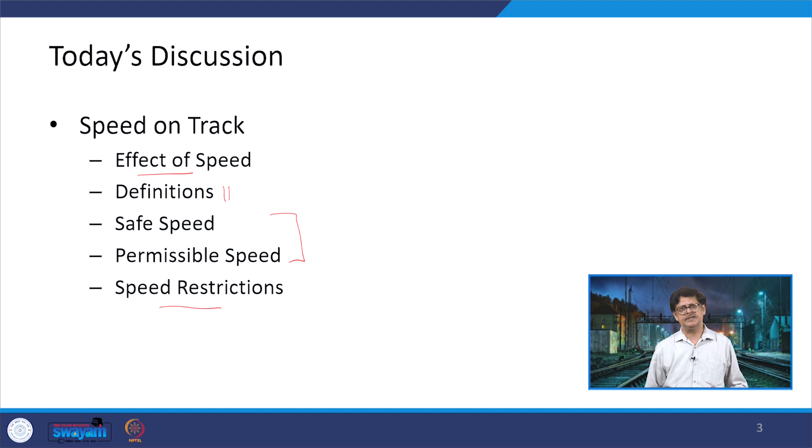Now speed on track has been classified by the classification of the tracks. If you remember, this classification of the track we discussed previously, that was from group A to group E.

In the case of group A, the speeds are up to 160 kilometers per hour, but in group B, it is 130 kilometers per hour. Group C is related with the suburban sections, which are available in the big metropolitan cities. Group D has two categories, normal and special.

In the case of special, speeds up to 110 kilometers per hour are provided, and the traffic density is more than or equal to 20 GMT, gross million tons. In the case of D, the speeds remain the same, but the traffic density is reduced, it is less than 20 GMT. In group E, all different sections or branch lines will come, where the speeds go up to 100 kilometers per hour.

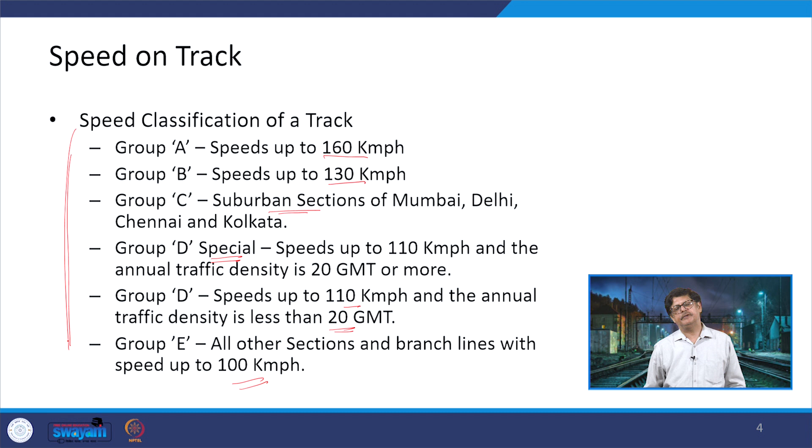So this is one idea regarding how the various speeds are going to be there on the different categories of tracks.

Now let us understand what we have discussed so far in different lectures, wherein speed has been talked about in combination with other things. We talked about the track structure, covering 110 km per hour speed to 160 km per hour speed, which was discussed under two subcategories: 110 to 130 and 130 to 160 kilometers per hour. There we discussed the height of the ballast cushion, the formation width, the slope, and the cess. So all those different aspects were correlated with these speeds.

Another discussion was related to industrial rails, IU rails, mainly used in industrial areas, where the speed restriction can be up to 50 kilometers per hour. We also talked about how speeds are specified with respect to the rail sections being used. If you are talking about lighter rail sections, the speeds cannot be high; for that you need a heavier rail section.

Sleeper density also is correlated with the speed, and these things are covered when we talked about the track structure. Similarly, about the ballast cushion.

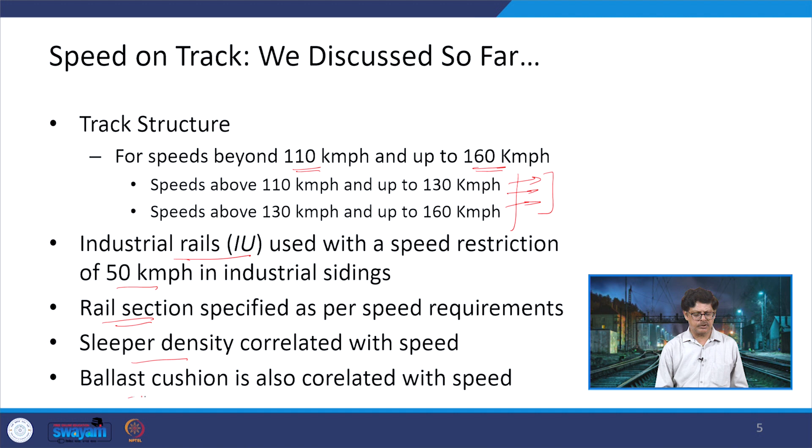Then we said that if yielding formations are there, the speed should be restricted, and first the formation should be treated, then only the speeds can be increased. The speed restriction is also followed where welding is being done between two rails, and speeds can return to normal conditions only after 30 minutes, or if grinding operation is going on, then the speed should also be reduced. The grinding operation comes up when we talk about corrugation on the rail head.

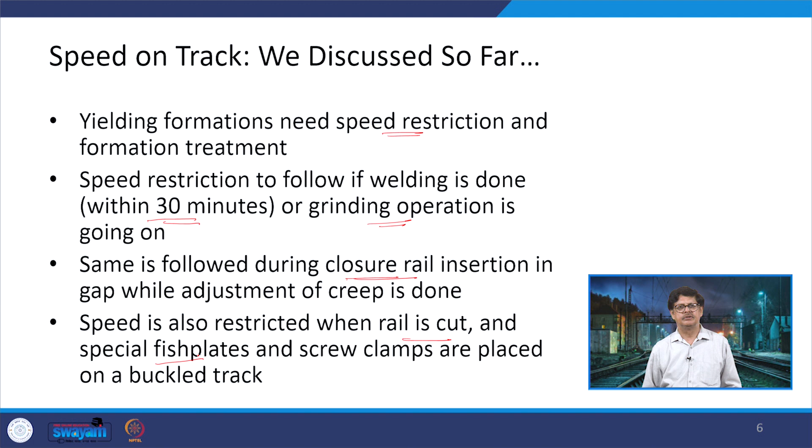The same is followed during closure rail insertion. If there is a gap between the rails, or some section is removed because of wear, failure, or fractures, then closure rails will be used, and during this operation, speed restriction will also be there. Speed is also restricted when the rail is cut, or when special fish plates or screw clamps are placed if the track has buckled.

Then we talked about major maintenances - lifting, alignment, deep screening, sleeper renewals - in all of these cases, and even where there are different temperature zones and the temperature goes beyond certain limits, the speeds need to be restricted.

Temporary speed restrictions sometimes need to be followed, as discussed when we talked about long welded rails or continuously welded rails. In those tracks, when the joining of rail ends is done with 1 meter long fish plates and special screw clamps, as discussed in the previous slide, speeds are restricted. There is a speed restriction of 30 kilometers per hour during the de-stressing operation of LWR.

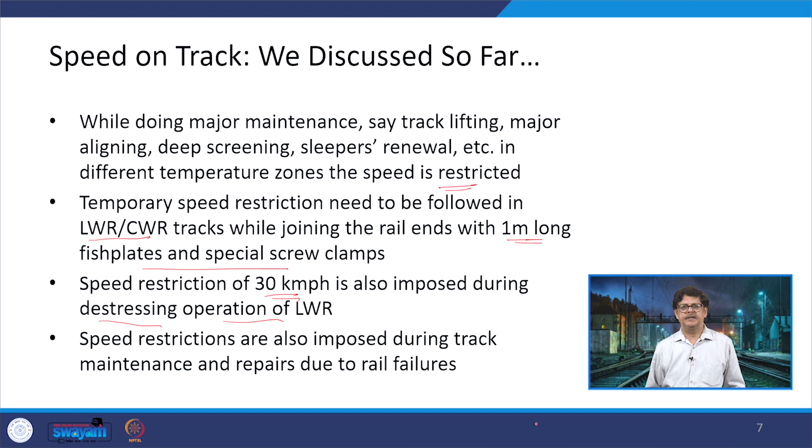Speed restrictions are also imposed when there is track maintenance and repairs due to rail failures.

Now let us look at the effect - there is a dynamic effect of the speed. If you see here on the diagram, say this is a wagon or a vehicle, you can define it whichever way you want. So this is the x axis, the y axis here, and z axis on this side, and the train is moving in this direction towards the right hand side. So what are the possibilities which can happen?

There can be a rotation about an axis or there can be a movement about an axis, and those are the things being defined here. If you look at the x axis, if it is rotating with respect to the x axis, then that is defined as rolling. It means it is moving in this form, taking oscillations like this.

When you talk about the y axis, then it is pitching, that is the rotation which is about the y axis. So sometimes this goes down and this goes up, or sometimes this goes down and this goes up - that sort of pitching condition will be there.

Then in the case of Z, that is known as nosing - rotation is known as nosing. That means there is a possibility that it will be moving in this form with respect to the z axis. So the movement can be like this, depending on which particular axis we are talking about.

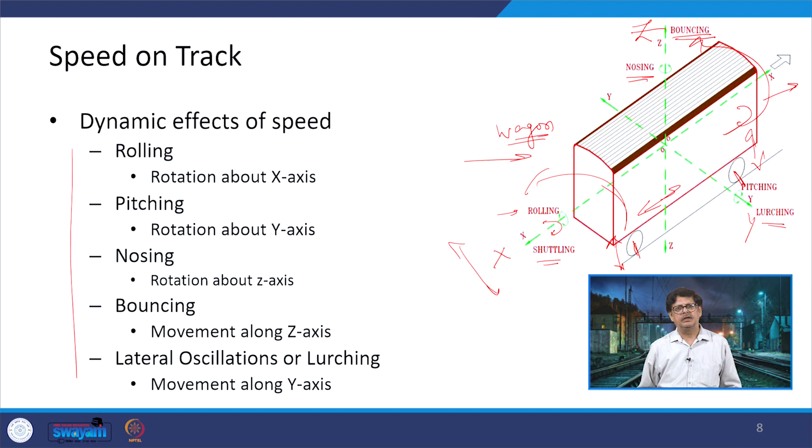Now, once we have discussed that, the other thing which may happen is resonance. This resonance occurs at the level where the wheel and the rail are in contact with each other, and when the train moves at a faster speed, those vibrations or frequencies get induced and transmitted to the rail head. So there is a sort of resonance which comes, and because of this resonance there is a possibility that the rail may fail. If it goes into failure, you have to go for maintenance. So in the case of high speed rail systems, this resonance becomes an important aspect which needs to be taken care of, and accordingly the material selection has to be taken up.

Springing action is again related to the vehicle - what type of springing is being provided, accordingly it will happen. Suspension characteristics are again related to the bogies. These are also going to be induced because of the speed on the track and the irregularity of the track in terms of the profile, in terms of the formation being provided at the bottom. So accordingly, these types of effects will come.

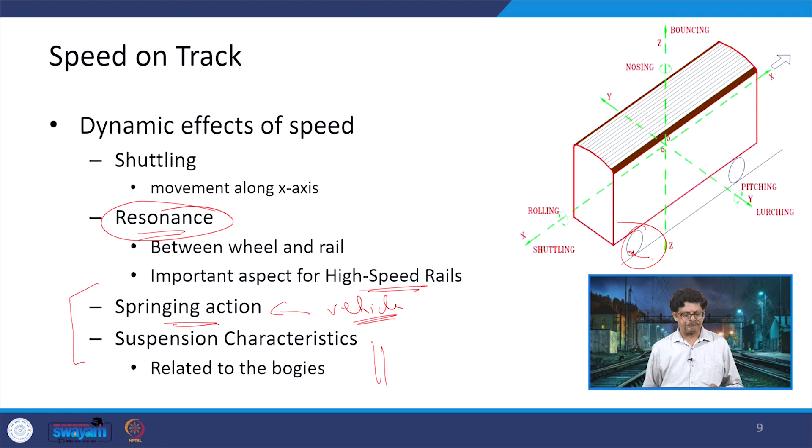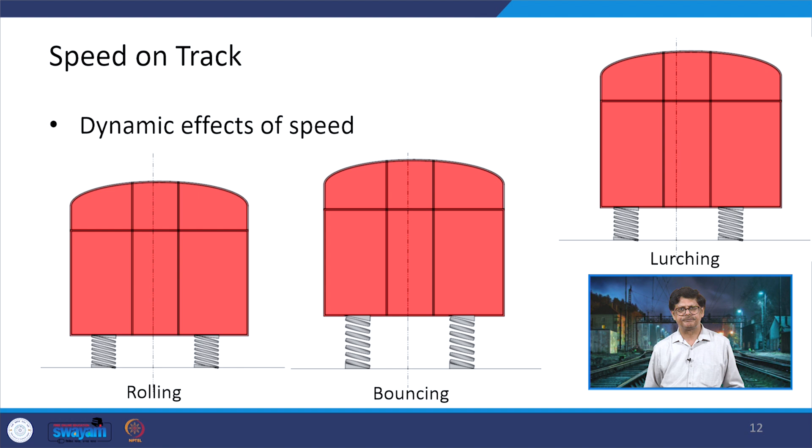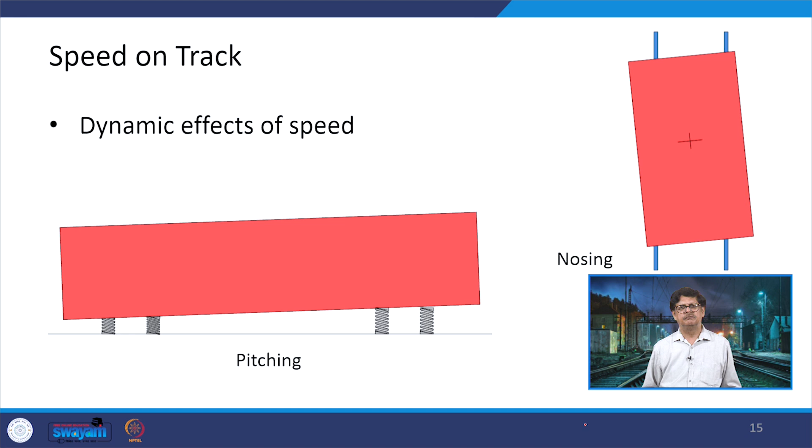Now let us talk about some definitions related with the tracks, which are computed as part of the geometric design and calculations.

The first one is maximum permissible speed on the track. This is the speed allowed for the operation of trains based on the structure - what type of formation, what type of ballast cushion and its thickness, and what types of sleepers and rail sections are being used. Based on this, the maximum permissible speed on the track can be defined.

One aspect we use is the average speed of trains, which is finally used to calculate the equilibrium speed - we will see about that. It is a journey speed dependent upon the length of the route and the time taken by the train to cover that route.

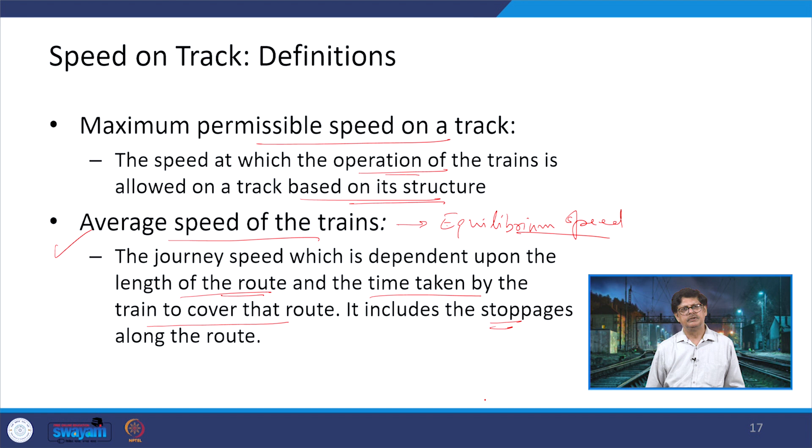This means the stoppages at different stations will also be taken into consideration, and that is why this is called an average speed - it is not a running speed. In the case of running speed, stoppages are not considered.

The maximum sanctioned speed on the track is a speed sanctioned by the track engineer, only under emergency conditions. This sanctioned speed is notified for each type of track and section. It is determined based on the standards of interlocking, the type of locomotive being used, the type of rolling stock, and the condition of the track. Considering all these aspects, the track engineer decides the sanctioned speed up to which the train can move, subject to an emergency condition.

Safe speed on a track protects the carriage from danger of overturning or derailment and provides a margin of safety. It is obviously lesser than the maximum permissible or sanctioned speeds. Up to this speed, the movement of the train is assumed to be safer and comfortable. Beyond it, there are possibilities of more forces or dynamic effects, which may cause issues.

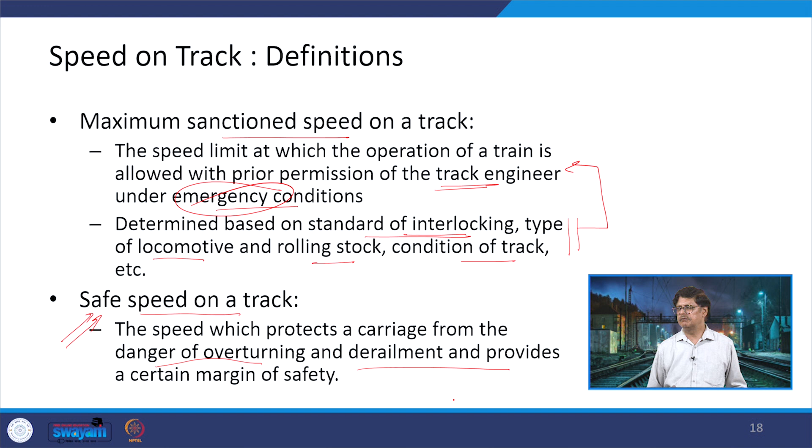As mentioned earlier, the average speed of trains on a track is used for finding the equilibrium speed. Equilibrium speed is also defined with respect to the centrifugal forces induced on a curved track. On a curved track, centrifugal force is induced, and to counter that we provide a cant, which will counter the centrifugal force. At this particular cant, whatever the speed is, that speed is defined as the equilibrium speed.

Not all trains move at this equilibrium speed. We talked about some value of cant because of this centrifugal force, which is related to the speed of movement, expressed as mv square divided by r, where r is the radius of the curve.

When the train moves at a speed lower or higher than equilibrium speed, this cant changes into cant excess or cant deficiency. If it is a lesser speed, less cant will be required - so there is a difference between the equilibrium cant and the cant actually required, say CR, which is lesser than the equilibrium cant. When speeds are more, we require extra cant, which will be more than the equilibrium value. It all depends on the high speed and low speed on the track with respect to this equilibrium speed.

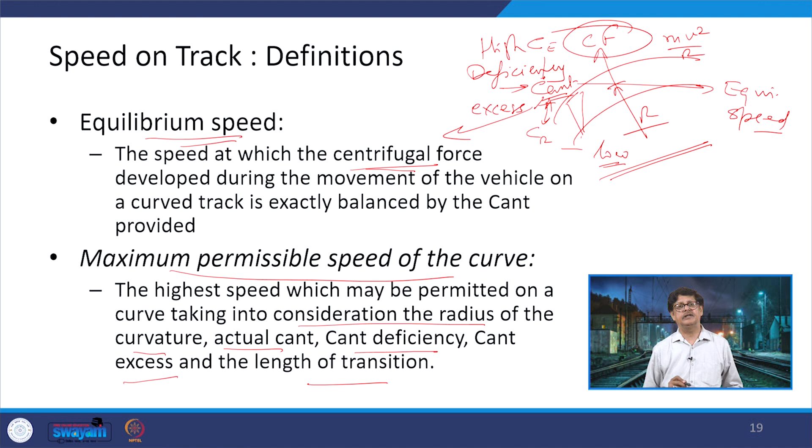Maximum permissible speed of the curve is the highest speed permitted on a curve, taking into consideration the radius of curvature, actual cant, cant deficiency, cant excess, and length of transition. Everything contributes to finding this maximum permissible speed. We have to consider what happens with trains moving at lower speeds compared to the equilibrium speed of trains moving at higher speed, what the radius is, what cant is actually provided, and based on that we get certain values, out of which one is taken as the maximum permissible speed.

This equilibrium speed is decided based on the maximum permissible speed defined by the track engineer, Vm, where m is maximum. Then permanent and temporary speed restrictions are defined by the traffic controller. The number of stoppages is defined based on how the profile was finalized, considering the revenue that can be generated, the possibility of gradients, and the proportions of slow and fast trains. When we say slow and fast trains, we are talking with respect to the equilibrium speed—anything lesser than that is slow, anything more is faster.

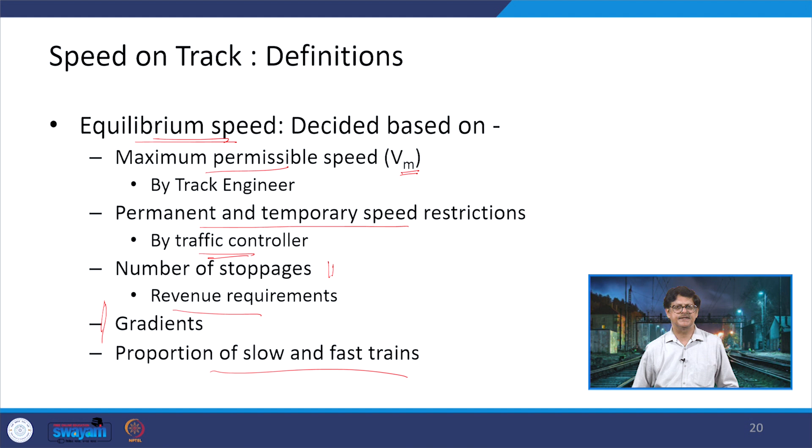Now safe speed is limited by the maximum speed defined for every train, as well as by the vehicular characteristics which differ within different categories of trains. So both of these have to be taken into consideration—what type of rolling stock is being used, since not every rolling stock will be able to move at the same safe speed, so you need to change that.

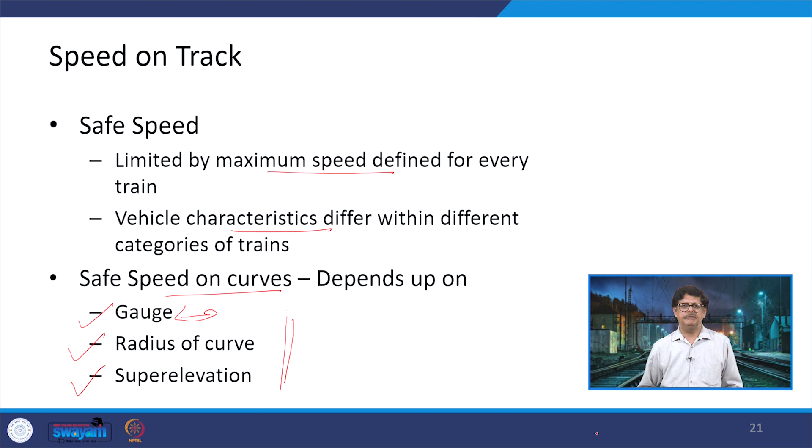Safe speed on curves depends on the gauge, the radius, and the super elevation—which we have discussed previously regarding radius and super elevation. One more contributing factor here is gauge. If it is broad gauge, the speeds can be higher; if it is meter gauge, then it will be lesser.

Then there's transition curve length. Since the curve being provided is a circular curve connected to a straight section, these two cannot be connected directly together—so a transition is provided between them: straight section, transition, and curved section. The length of this transition, and whether it has been provided or not, will also define what the safe speed can be on this track.

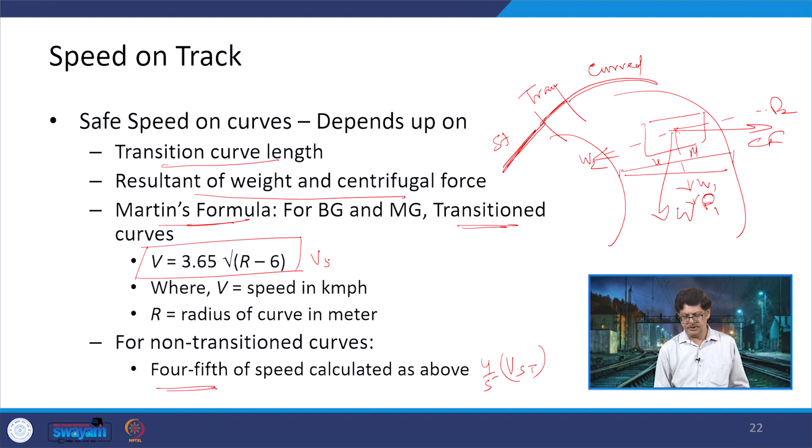Now, this formula has been in use previously, but it is being changed. A new formula has come up, based on the assumption that the center-to-center distance between the rail heads is 1750 mm.

This 1750 mm is on the basis of the gauge plus the rail head width. So if we say the gauge is 1676 plus the rail head width, this 1750 mm is how it is being taken, and this is for us a 52 kg per meter rail section.

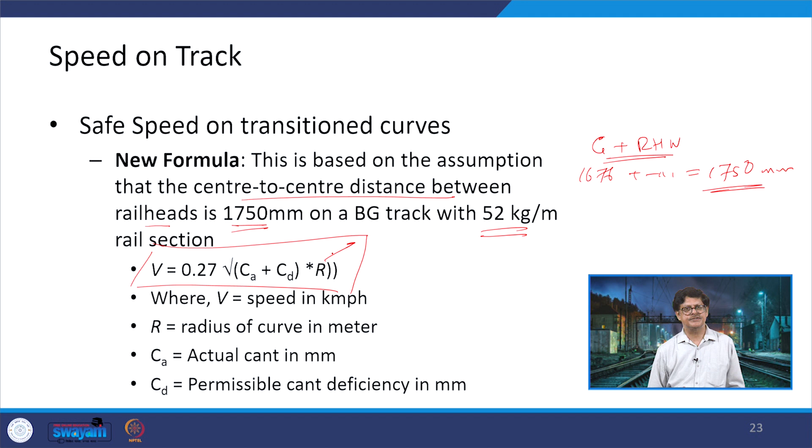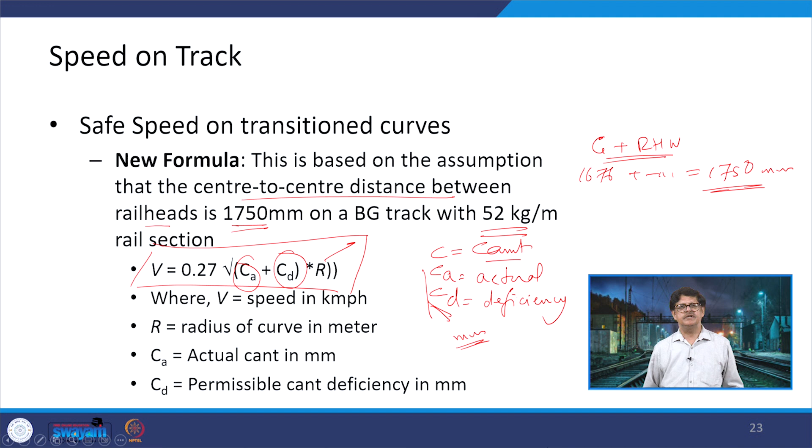Here the formula being given is 0.27 under root of summation of Ca plus Cd into R. So here you can see that the radius is being considered, which is in meters. Apart from that, Ca and Cd, where C stands for cant, A stands for actual, which can also be an equilibrium cant, and D is deficiency. So this value of Ca or Cd is being defined for the different type of tracks. A constant value is being provided, and these values are in mm. So when we put these values into this equation, we get the safe speed V in kilometers per hour.

The safe speed on the non-transition curves with cant is based on a virtual transition. So there is no transition being provided as such, but a virtual transition is being talked about. Let us discuss what that is.

This is a change in the motion of a vehicle from straight to curved conditions, which takes place over a distance between the bogie centers, commencing on the straight at half the distance before the tangent point and terminating on the curve at the same half distance beyond the tangent point. So you have a tangent point, this is a straight section, and from here the curve starts.

When we talk about the bogie movement, we consider the distance between the bogie centers, and half of that distance should come before this point and half should come after. So this is one bogie condition and this is another bogie condition, that is the center to center distance. Half of that here and half of that here - that is how a virtual transition is being talked about, and the length of this virtual transition is 14.785 meters, based on the way the bogies have been placed.

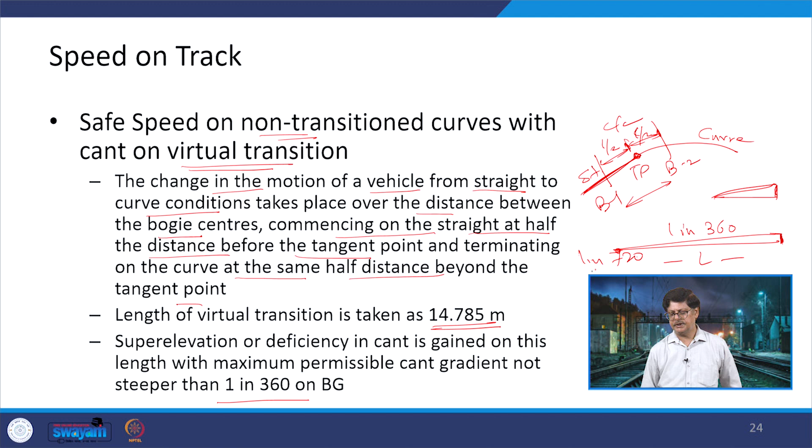Now, super elevation or deficiency in cant is gained over this particular length, with maximum permissible cant gradient not steeper than 1 in 360. So whatever height is to be achieved, we start from here and achieve it over this particular length L. Slowly this height is attained, and the rate defined here, 1 in 360, is the maximum level at which it can be attained. As far as possible we try a flatter condition, which would be 1 in 720. We will discuss this rate later also.

In the case where we have an inadequate length of the transition curve - we calculate the length of the transition curve based on ideal conditions, but the ground reality is that we cannot provide that much length, so we end up shortening it. When we shorten the length, the other parameters are also affected. What this means is that the length is calculated based on the actual cant or the cant deficiency, which is the normal condition with which we proceed.

The limiting values of the cant and cant deficiency gradient, as well as the rate of change of cant and cant deficiency gradients, are considered. There are certain rates - we talked about 1 in 360, 1 in 720. Similarly, there are values like 35 mm per second or 55 mm per second, which is the desirable and maximum permissible rate at which the cant deficiency or cant values can be changed.

Considering this, we take the length that is available to be provided as a transition curve, and we calculate the speed. So using the permissible limits and the length, the speed is calculated, and this speed should not exceed the maximum permissible speed of the section. Obviously it will not exceed that, because the permissible limits are already reduced.

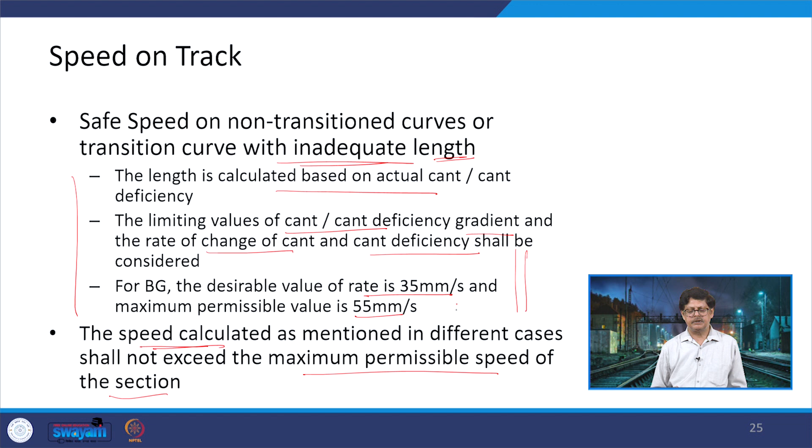Now, what is going to be the maximum permissible speed? It is the lower of three conditions: permissible speed for fully transitioned curves, for non-transition curves with cant on virtual transition, and non-transition curves with no cant at all.

So for these three cases we calculate the values, and whichever is lowest of the three will be used. Now for high speed sections, along with these three cases, we also consider the case where the length of transition is inadequate. So we have 4 cases here, and out of those 4 cases whichever is lower is considered the permissible speed. When we take up the numericals, you will get further idea of which value has to be taken and how these different speed values can be calculated.

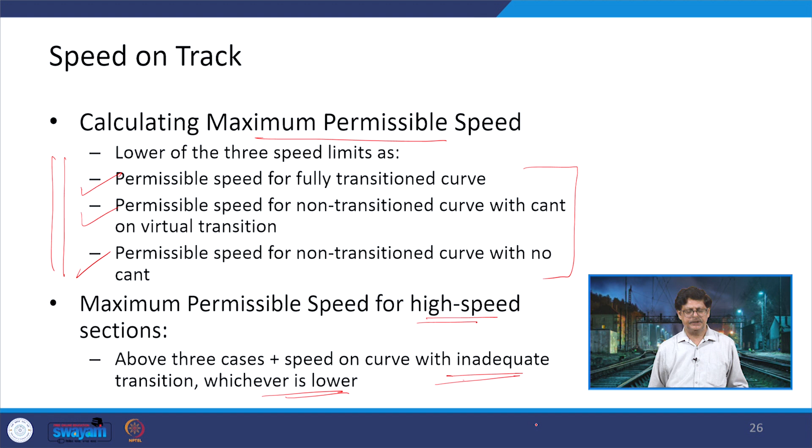Record the maximum sanctioned speed on the section from the authorities, and calculate the maximum permissible speed on the section based on the cant deficiency. So we first calculate the equilibrium speed, then calculate the equilibrium super elevation or cant, add cant deficiency to that, and then calculate the speed using the formula given here. We talked about this formula, this is the new Indian Railways formula being adopted.

Now calculate the maximum permissible speed on the section considering speeds of goods trains as well as cant excess, because the speed of the goods train is lower than equilibrium. Since this is lower, the requirement of cant is also lower, whereas the cant provided is higher, so there is a cant excess already there. Considering these two conditions, we calculate accordingly.

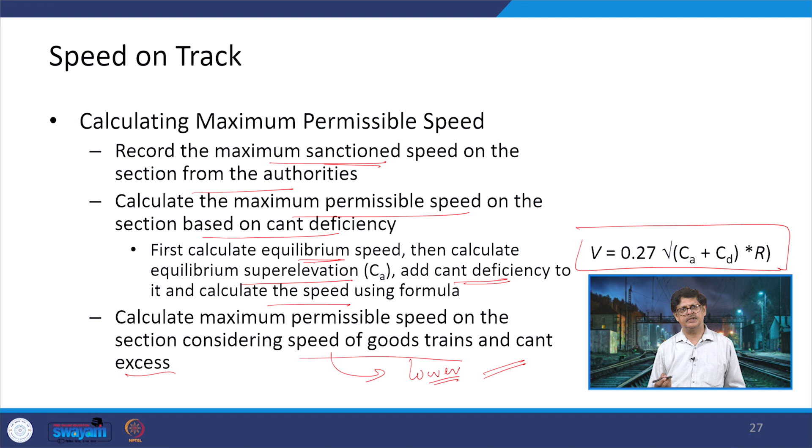Cant excess is calculated based on the speed of the goods train, and then the cant excess is added to it, and again we calculate the speed. So previously we used cant deficiency, now we are using cant excess, but the actual cant remains the same, and the radius of the curve remains the same.

Then we also calculate the maximum permissible speed related to the length of the transition curves. Whatever lengths of transition curves there are, they have rates - we talked about 35 mm per second, 55 mm per second, or the cant gradient of 1 in 360 or 1 in 720. Based on that, these length formulas exist. When we take up the calculation of the length of the transition curve, we will discuss that, but here we are talking about how different types of speeds can be calculated, and which one is taken up.

For high speed broad gauge tracks, when the speed is restricted due to the change of cant deficiency exceeding 55 mm per second, it may happen that cant deficiency goes beyond 55 mm per second, but we cannot go beyond the permissible maximum limit. In that case, the cant deficiency is limited to values less than 100 mm, and again the speed is calculated, which will be lesser than the previous values.

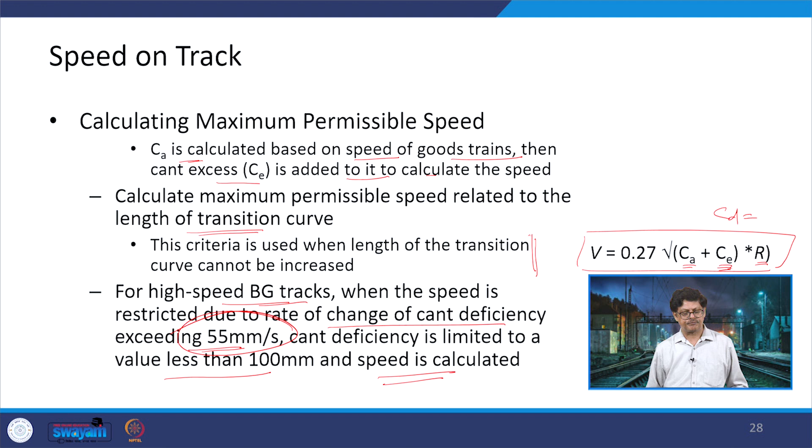Coming back to the equilibrium speed, the rule states that if the maximum speed is more than 50 kilometers per hour, then it is 3/4 of Vm or Vs - three-fourths of the maximum speed or the safe speed, which we calculated with the formula 0.27 under root of Ca plus Cd into R, or Ca plus Ce into R. When the maximum speed is less than 50 kilometers per hour, then it is Vm or Vs, whichever is less.

Now, weighted average: here we are talking about the distribution of trains with respect to speed on the same track. Not all trains move at the same speed. There may be N1 trains moving at speed V1, N2 trains moving at speed V2, and so on. Whatever N or M categories there are, we can have that data, and using it we calculate a weighted average: N1 into V1 plus N2 into V2 plus Nm into Vm, divided by N1 plus N2 plus Nm. If we take that, we get a weighted average value - this is the equilibrium speed.

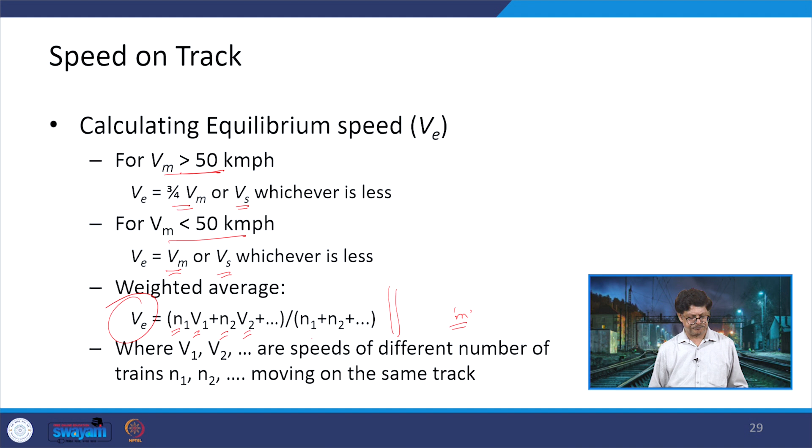Let us look at one numerical here. There is data of trains running on a track with defined speeds: 40 kilometers per hour with 10 trains, 50 kilometers per hour with 12 trains, 60 kilometers per hour with 15 trains, 80 kilometers per hour with 20 trains, and 100 kilometers per hour with 10 trains. So we are going to calculate an equilibrium speed which is a weighted average of this data: N1 V1...

When you talk about trains it is N, when you talk about speeds it is V, so this is Ni and Vi. We take the multiplication of that and divide by the total numbers, taking the total number of trains as a summation. So this is 20, 30, 40, 50, 60, 67 number of trains with this profile. So 10 multiplied by 40, 12 multiplied by 50, 15 multiplied by 60, 20 multiplied by 80, and 10 multiplied by 100, divided by total number of trains 67, gives us the equilibrium speed as 67 kilometers per hour.

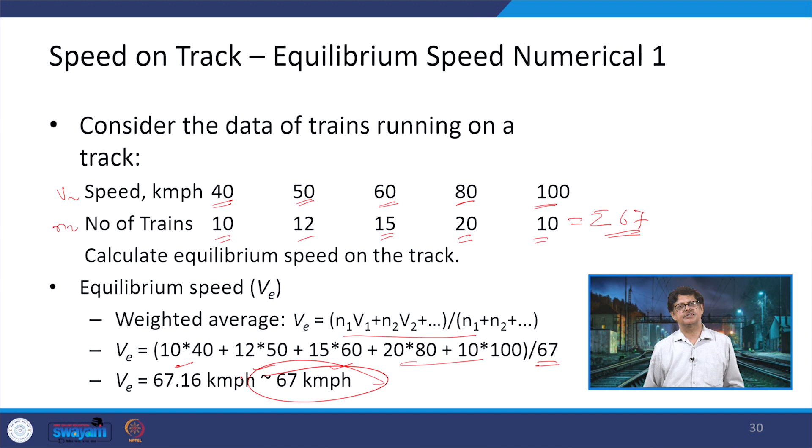Now let us talk about the restriction schedule, which is the last thing in this particular lecture we are going to discuss. There can be different restrictions: 0 speed, 10 kilometers per hour, 20 kilometers per hour, 30 kilometers per hour, or 50 kilometers per hour.

The restriction of 30 kilometers per hour is imposed when a 1 meter long slotted fish plate with screw clamps or MS clamps, or joggled fish plates with bolted clamps, are used on a temporary rail joint. When this temporary rail joint is created, it should remain under 24 hours watch, so somebody is watching that as trains move, it should not open out. So in this case, the restriction of speed is 30 kilometers per hour; the train cannot move more than that.

Another case is when the sleeper fastenings on the alternate sleepers are loosened before de-stressing is done. We talked about de-stressing when we discussed long welded rails. So when not all sleepers but alternate sleepers are loosened simultaneously, there is a weakness in the track, and trains cannot move at a higher speed. That is where the speed restriction of 30 kilometers per hour gets imposed.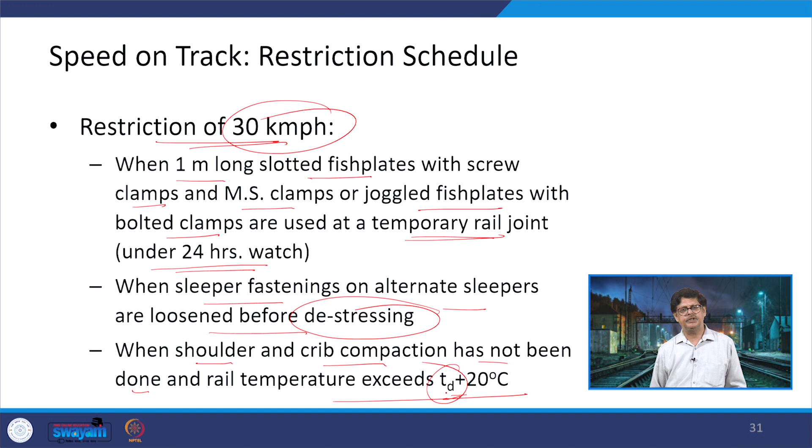When the shoulder and crib compaction has not been done, and the rail temperature exceeds Td plus 20 degrees centigrade, where Td is the de-stressing temperature. If you remember, we talked about the various types of temperatures: T0, TM, TP, TD. So here we are talking about Td plus 20 degrees centigrade.

What are the cases for 20 kilometer per hour restriction? After emergency repair of the fractured rail track, there is a big problem now, so more restriction is imposed. Doing an emergency repair doesn't mean the whole track is being changed.

After emergency repair of buckled rail tracks, when subsequent trains run, the restriction is 20 kilometers per hour. Or on temporary rail joints, as discussed previously, if it is not under the 24 hours watch, then the speed is reduced further to 20. There we were talking that it is being watched for 24 hours and therefore the 30 kilometers per hour speed was allowed.

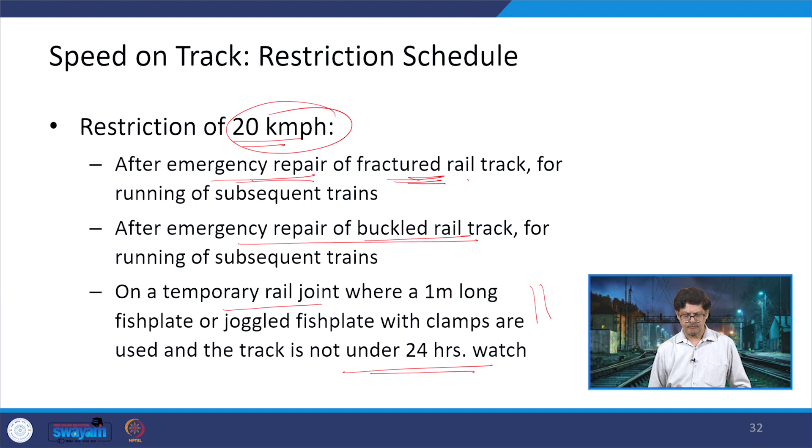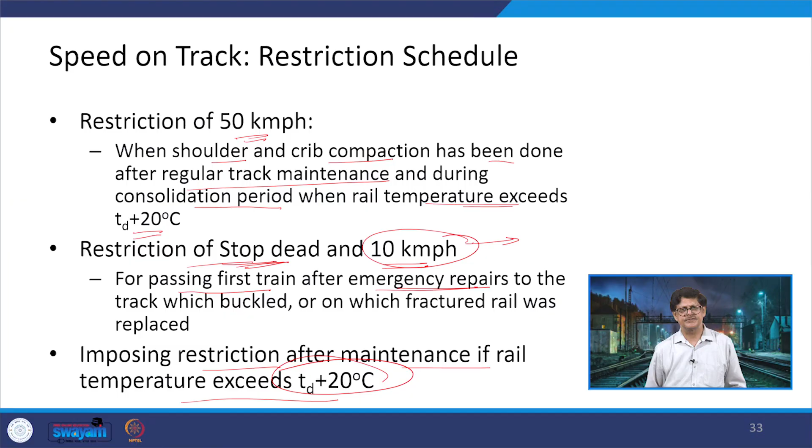With this we close our discussion now. What we discussed was the speeds on the tracks, the dynamic effects of those speeds in terms of the 3 axes x, y and z, rotational movements along those axes. Then we talked about various definitions. We discussed how the safe speed on a track can be calculated, what can be the maximum permissible speed under different situations, and finally what is the equilibrium speed. Thank you, and we will be meeting in the next lecture.